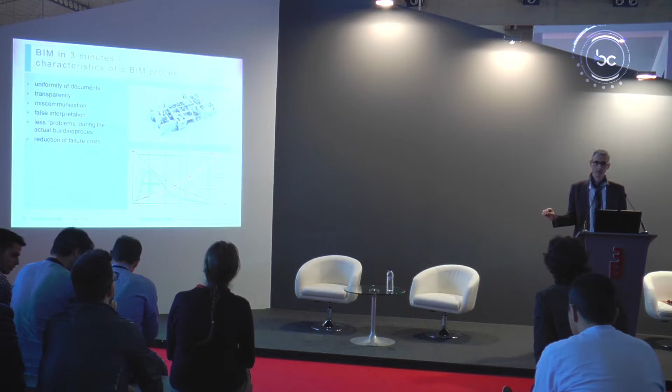So, reduction of failure costs. And with this graph, I would like to show you what it means, where the influence of changes should take place: in the design process, not in the building process. Because the red line, that's the line of the costs in time when you make changes. So there you have it. At the end, when you are building the building, your design, if you make changes at that point, it will cost you gold.

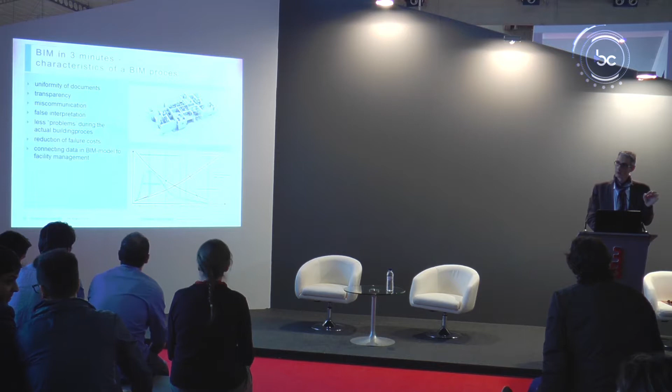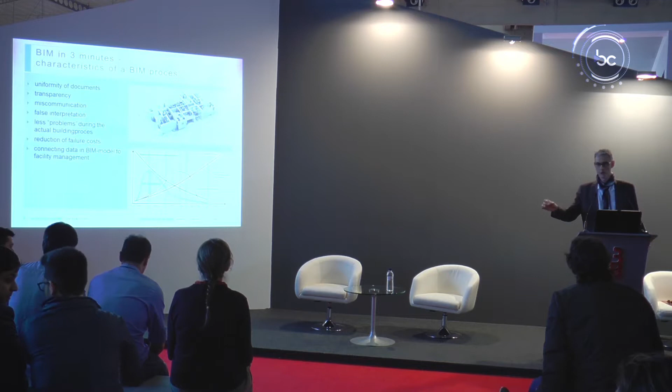And of course, connecting your BIM data that you put in a BIM model, use it later on for facility management, because that's the goal of BIM. The goal of BIM is not only to make reduction of failure and then that's it. The goal of BIM is using it until the building is demolished. And that's what we should think about.

Now, the architect. Architect comes from Greek, as you probably know, architekton, master builder. And in the past, we were master builders. We were responsible for the entire building process. We had the first contact with the client, and we translated his requirements into a building and coordinated the entire process from the early start until sometimes even demolishing the building.

So nowadays we make design concepts. We used to do that, but we make design concepts which have to meet the requirements of a client. But unfortunately, most of the time, there it stops for us. And that is, in my opinion, incorrect.

What is also happening, I don't know if it's here in Spain already happening, but the client positions are changing. In the past, for example, in a hospital, a board of directors, they were my clients. Now we have so-called design, build, finance, maintain and operate contracts, which means that the actual hospital is not my client anymore. A group of contractors is my client. They hire me to make a building for them, but their client is the actual hospital. So that changes our role. We are not anymore the first to come in contact with the user of the building. So we have to think about that as well.

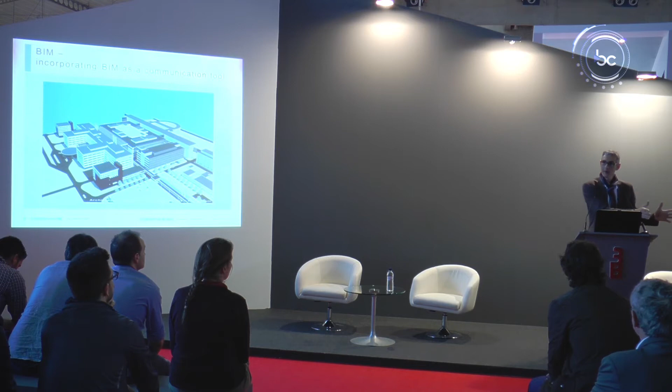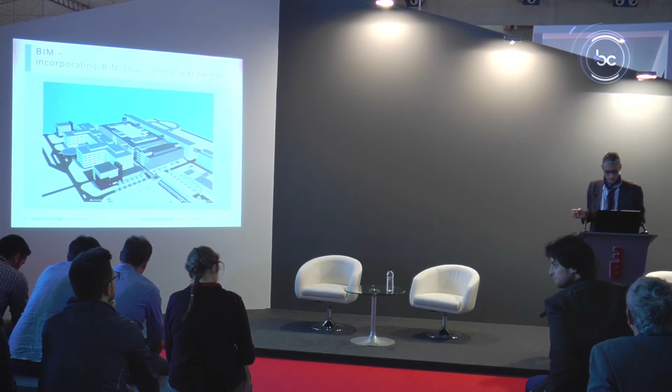This is the academic hospital in Maastricht. It's a building of about 200,000 square meters. The building was originally built in 1992. Now, the life cycle of a hospital most of the time is 50 years, but after 25 years, a large renovation most of the time takes place. And here I have a new challenge for you. Creating a BIM model of a building which already is in use, which should stay in use, but at the same time you have to make large renovations. I will show you later on the renovation of the entire Department of Surgical Operations, about 20,000 square meters.

First of all, we made a new building there, and we used, in this case, Revit, but just to make visualizations. This is a nice communication tool for your client. They can actually see in 3 dimensions how the building will be. Now, in this particular case, this is how it's going to be. But we use this also during the design process to evaluate with the client, especially the wall, the blue wall you see below; we had different types of possibilities for them. A wooden wall, a plastic wall, different colors, and with the visualization of it, the client or user can make better decisions about what he would like, which doesn't mean that he always determines how the architecture should be designed, of course.

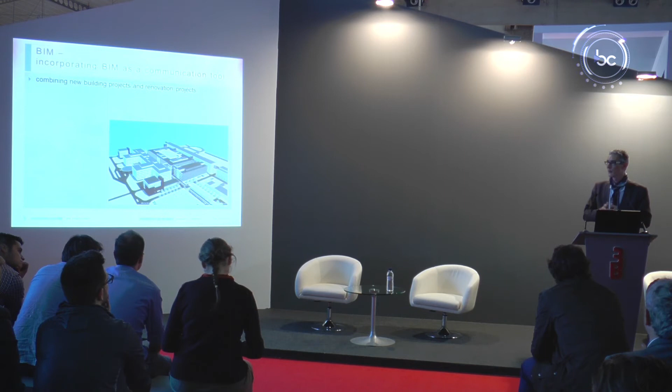And second of all, how do you make a BIM model used by the hospital for facility management while I have to use it at the same time because I'm still renovating another part of the hospital? And maybe it looks like I have a lot of questions, but that's what I also want to show you. We're still not there with BIM. If I compare BIM with the life of a human being, I would say BIM at this moment is in primary school. There are still a lot of questions that are not answered by anyone, not even by Autodesk.

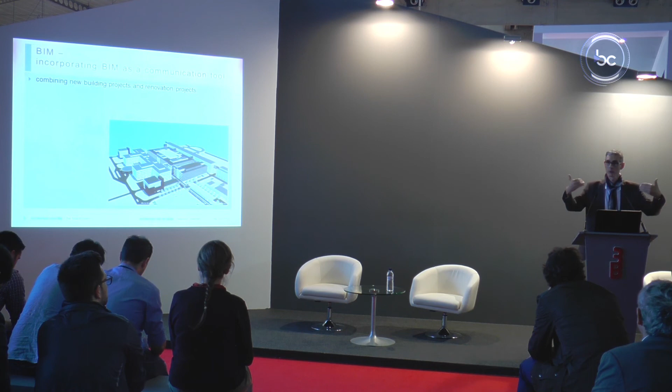So that's why, for example, where is the legal responsibility of the BIM model? Now, if I have, for example, a work which starts at point 0 and ends at point 100, it's very simple. I make the model, the responsibility legally is with me, and at the moment the building is built, I transfer the model to the client, and then it's legal for them. But I want to ask you, where is the legal responsibility here?

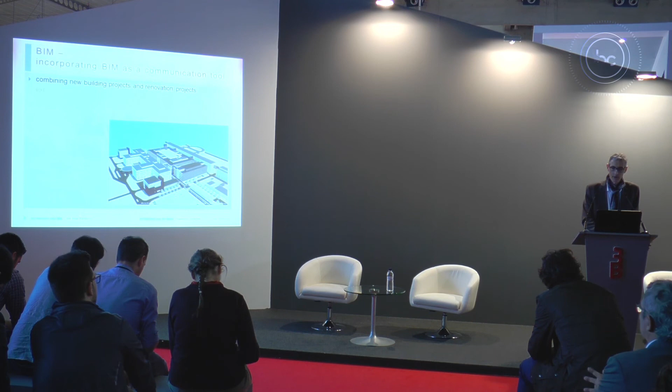Now I got a little signal, so I'm going a little bit faster because what I want to show you is the future. And that's why this one is double. Just 1 minute, and I'm ready.

Final frontier? Well, in my opinion, not. As I already said, we're in primary school. BIM modeling can be used for augmented reality. Augmented reality not only during the building process, but also later on in maintenance. How many times doesn't it happen that they have to look at all kinds of drawings? Where are the installations? Where exactly are my shutters? With augmented reality and a correct BIM model, that's our future. They're already experimenting in the United States with that.

Communicating with your client, not only with drawings, no. There is software, Unity 3D, which can transfer your complete BIM model into a game engine, and then you can give that to your client and they can watch their building on a Nintendo Wii console, on an Xbox, you name it. They don't need computers. Combine that with the Oculus Rift visualization glasses, and you can actually invite your client to your office and say, well, you know what, you want to walk through your building? Have a go. And they can actually experience the building, not only from images.